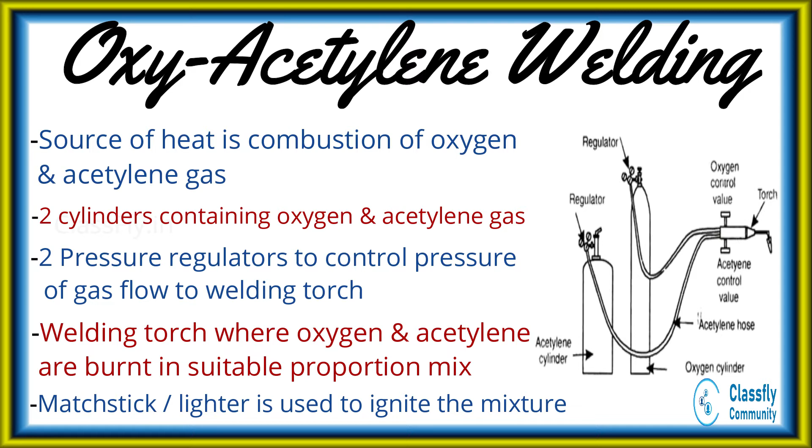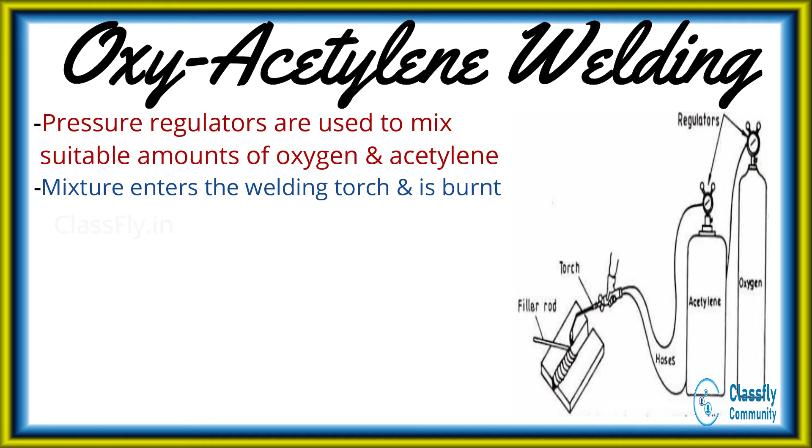In operation, the pressure regulators are adjusted such that suitable proportions of oxygen and acetylene gas will enter into the welding torch. In the welding torch, the gases are mixed and then burnt in the atmosphere. This will result in the generation of a flame at the torch tip, which will have a temperature ranging from 3100 to 3500 degrees centigrade. The heat of this flame is then used to melt the workpiece metals.

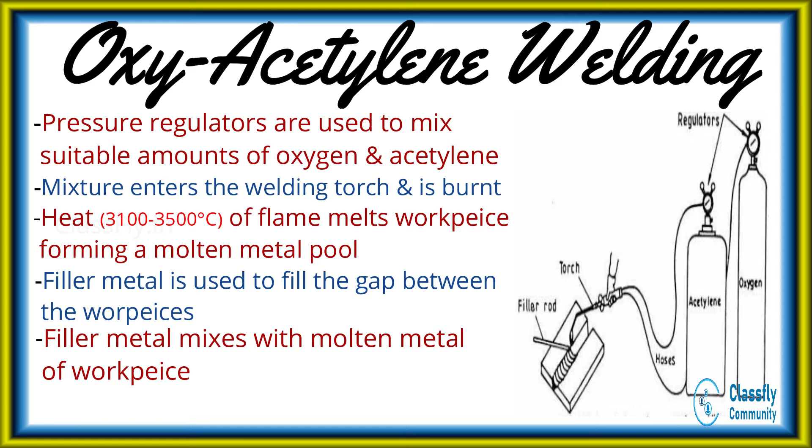Here, the filler material may be used to supply the additional material to fill the gap which exists between the two workpieces. The molten metal of the filler material will combine with the molten metal of the workpiece and upon solidification will form a joint and hence a single piece of metal.

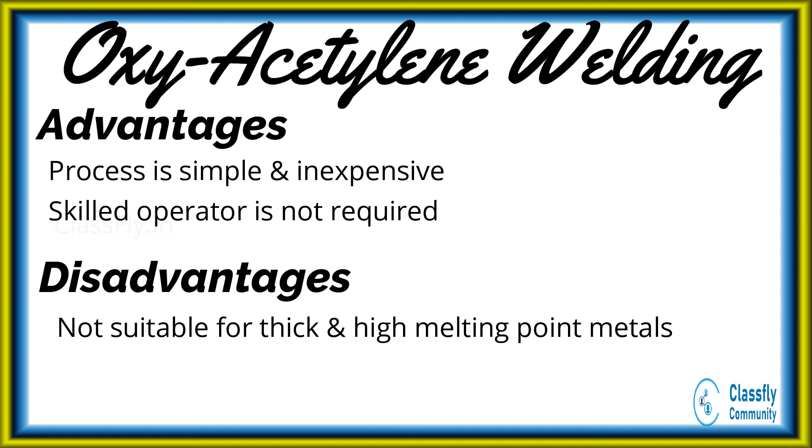Hence, we can see that the process is simple and inexpensive and also eliminates the requirement of a skilled operator. But it is necessary to note that this process is not suitable for welding thick and high melting point metals. Also, acetylene gas is highly explosive. Hence, proper precautions should be taken regarding its storage and use.

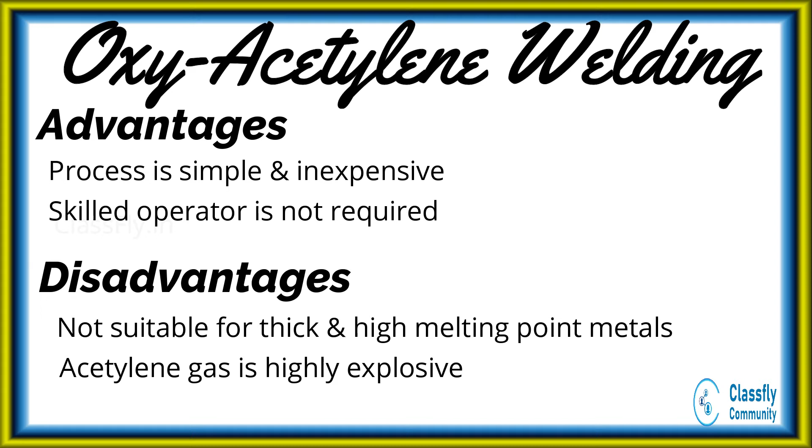Well, depending on the amount of oxygen and acetylene gas mix, different types of flames can be produced in the welding process. Let us study them. First, the neutral flame. Well, the neutral flame is produced when approximately equal amounts of oxygen and acetylene are mixed and burnt at the torch tip.

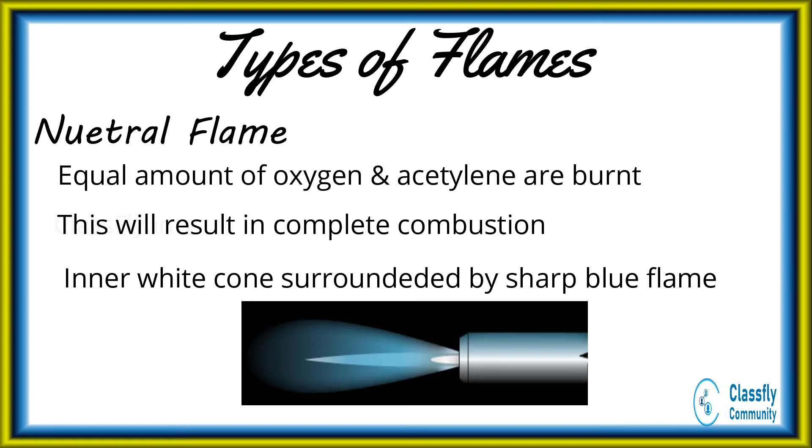This flame will result in a complete combustion as all the carbon supplied by the acetylene is being consumed. Hence, this type of flame will consist of an inner whitish cone which will be surrounded by a sharp blue flame. The neutral flame is used for welding mild steels, cast iron, aluminium, copper, etc.

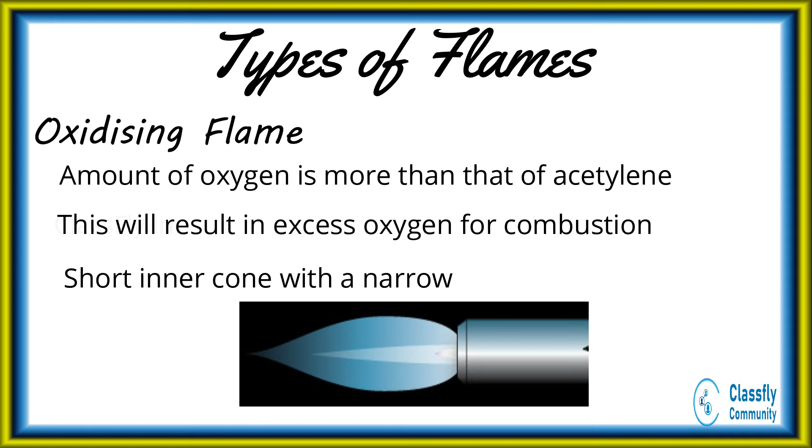Next, the oxidizing flame. Well, it is a flame in which there is excess oxygen than required for complete combustion. That is, the amount of oxygen is more than that of the acetylene gas in the mixture. This type of flame will consist of a short inner white cone and an outer envelope which will be narrow and bright in color. These types of flames are used for welding copper based metals and zinc based metals.

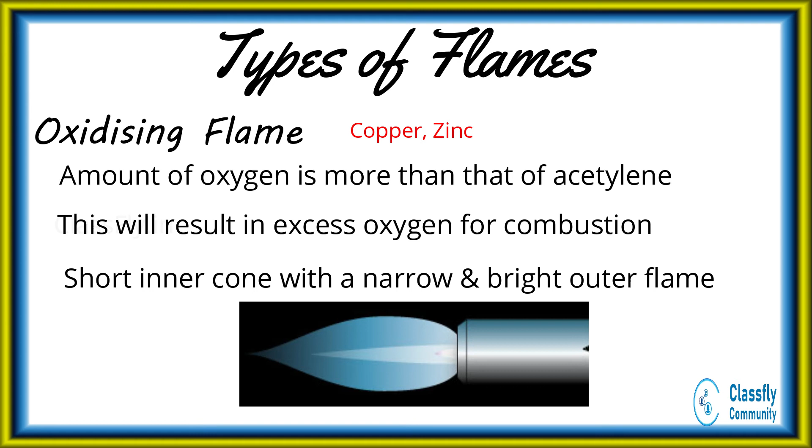Next, the reducing flame. Well, this type of flame will consist of excess acetylene. That is, the amount of acetylene will be more than that of the oxygen in the mixture. Here, the combustion is incomplete and hence there will be unconsumed carbon present in the flame.

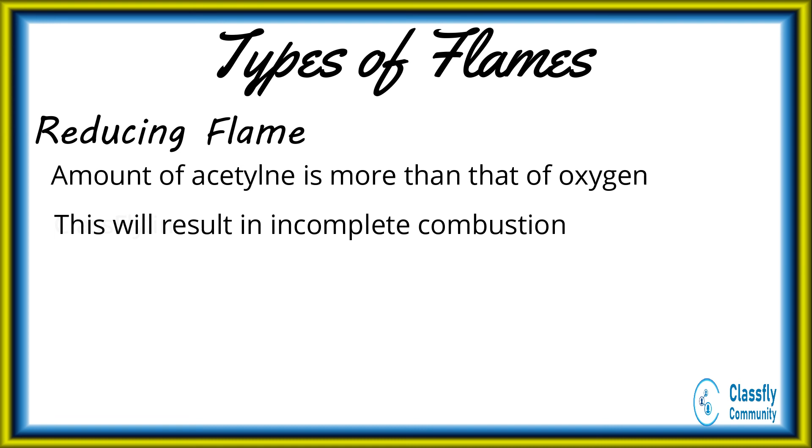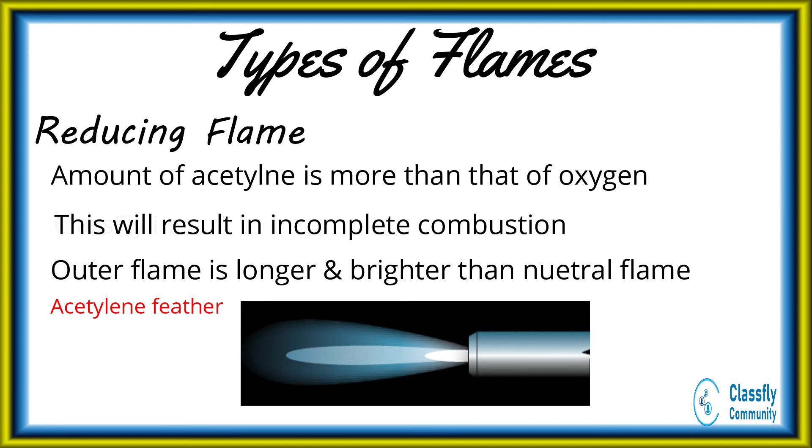This type of flame can be recognized by an acetylene feather which will exist between the inner cone and the outer envelope. The outer envelope is longer than that of the neutral flame and also is much brighter. These types of flames are used in welding nickel and copper alloys and a few of the non-ferrous metals.